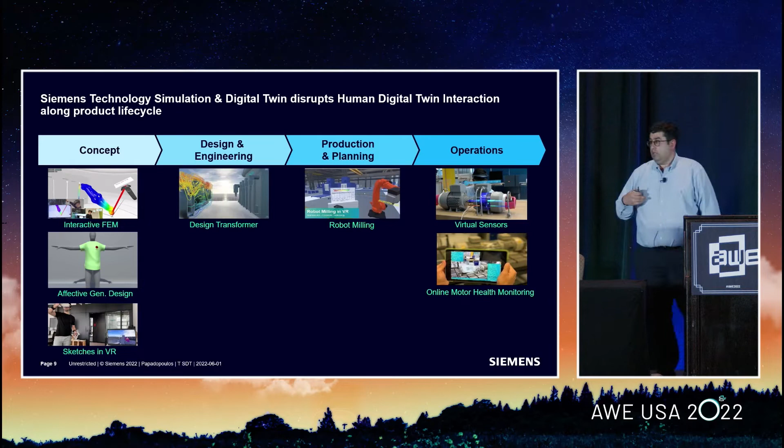Because we cannot have an infinite number of sensors, we're using virtual sensors there, which provide more information and augmented information to the operator, so he can take better decisions. Or we can offer him other information, like what's the rest useful lifetime of a critical component, or what's the status of the overall process.

As you saw before, all these applications have one common characteristic: in the back end were complex simulations, but the front end was really simplified for the user to interact and get results. We developed these applications, but each time it was done from scratch, more or less.

And we said, why don't we do that more systematically? Why don't we address the topic in a central way, so we can develop one platform that can tackle multiple problems. That's how we ended up with our proposal today here.

The reason is, in the engineering world, we currently have two major challenges. The first one is we have product development in silos. That's a common truth, and we are working

in a discipline-specific environment, so we may have tools that store the data centrally and orchestrate this data, but the simulation results can be retrieved and interpreted only by the experts. In this case, for example, a mechanical expert can interpret the mechanical results, but he cannot understand the computational fluid dynamics or the acoustics, or he cannot access them for multiple reasons.

And what happens today is the interpretation of these results from other experts relies on personal exchange and contact, so the experts have to meet and exchange information about the results. In this case, for example, if you have a field engineer doing a test and he needs information from the simulations, because the simulations offer 360 information for an experiment while the tests have only discrete positions of the sensors, he has to call the simulation expert and ask for this information. He himself from the field cannot retrieve the data because it's very difficult to interpret with the current situation.

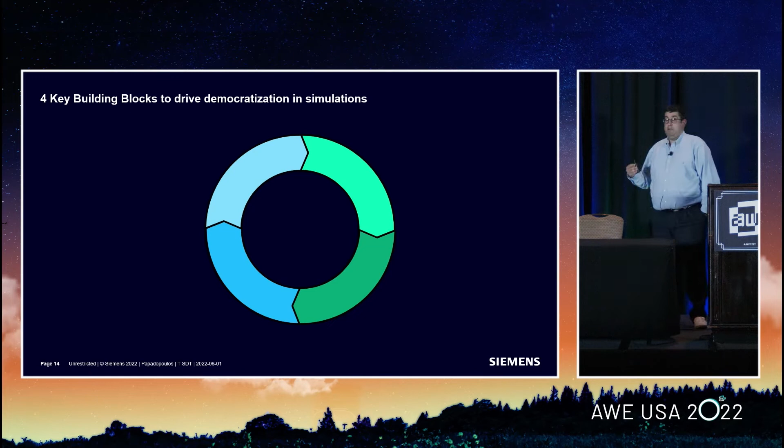Now, coming to the democratization, we at Siemens Technology believe that there are 4 key pillars that can drive democratization in simulation. The first one is real-time collaboration, how we can bring different people from different disciplines into the same environment, exchange information, and everyone has access to the same information in real-time.

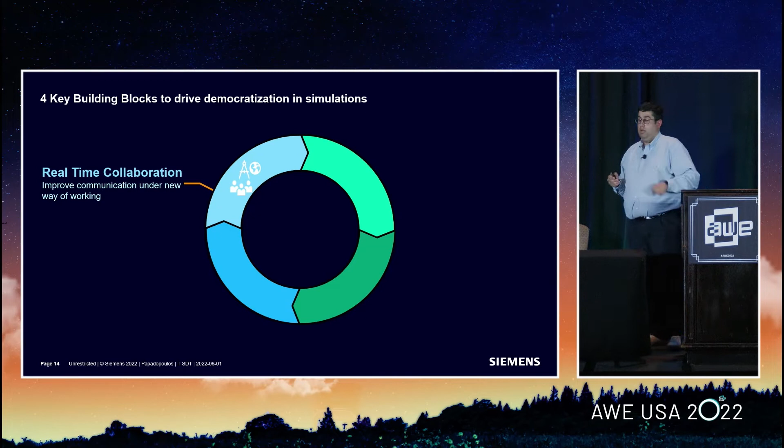The second one is interactive simulations. That's the next generation of simulations where novice users, especially in the concept phase, the very early phase, want fast feedback for their actions. If you are a novice user, you don't have the patience to wait for our traditional engineering tools, which take hours, sometimes days. You want fast feedback for your actions.

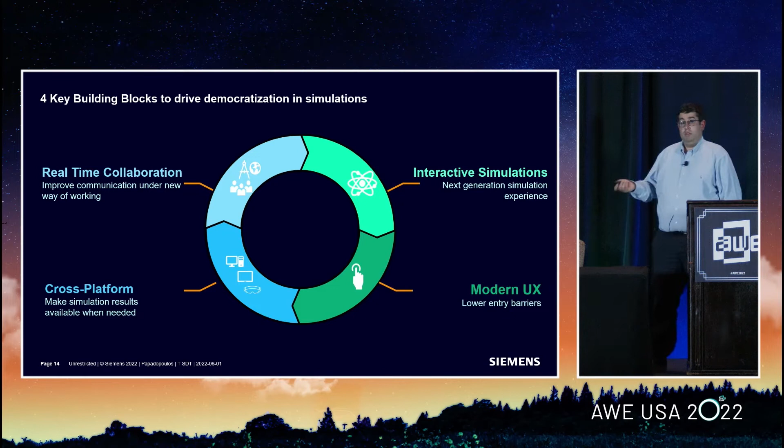Then modern user experience, which will help us lower the entry barriers for them and make the simulation world more easy and tangible. And finally, cross-platform. Nowadays, people want access to information when they need it and not only when they sit in front of a PC. For that reason, we have to make our simulation tools capable of running on different devices like tablets, phones, or even PC, VR, AR glasses, whatever is used by the user each time.

We sat together with my colleagues from Digital Industry Software, the experts we have there from the simulation and test solutions, and we asked: which use cases do we have in-house where we can demonstrate this democratization has a huge impact for the users? We identified 3 use cases.

The first one is acoustics, the interactive ones. As you can see in the small picture below, the acoustic experts each wear headphones, sit around a table, everyone listens to a sound, and they have this heat map generated from the simulation tools. If you ask me, I'm not an expert, I have no idea what these heat maps are about. Because sound is also about experiencing, not only something for a user.

What does this sound mean in my real context, in my real environment in the future? Or how can I perceive it spatially? So first-person immersive experience is very, very important here. But the results have to be physics-based and not just realistic, should be accurate, because we're speaking about industrial grade accuracy here, and the customers expect that from our tools.

The second one comes from one of our tools, Simcenter 3D. It's a simulation tool, a very powerful tool. It has a lot of fields of study. That's a huge advantage if you look at it from the point of content.

But if you are a novice user and you enter and you have all this physics and all these buttons, you are overwhelmed, you don't know where to start. So it's a little bit problematic, and the easy path to post-processing to analyze the results is not so happy, this whole process. But it's not only about the novice users, the experts there told us that they want more immersive experience and more collaborative environments. So that's why we said this use case is also interesting for our case.

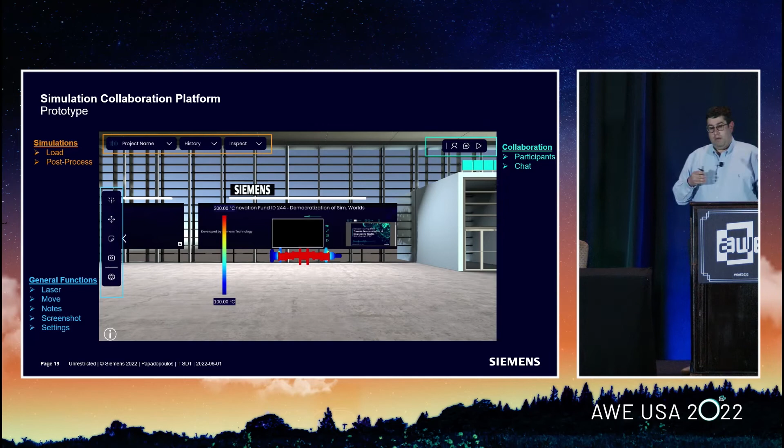The upper right one is with the collaboration part, where you can see the other participants there. You can start the chat function with the others, or you can go to the presentation mode. Then we have on the left side the bar, where we have the general functions, some generic functions like laser pointer, activate to move the object, or you can leave the sticky notes there.

You can take a screenshot, and there are settings where you can change between dark and light mode, or you can mute yourself, change the voice levels, and things like that.

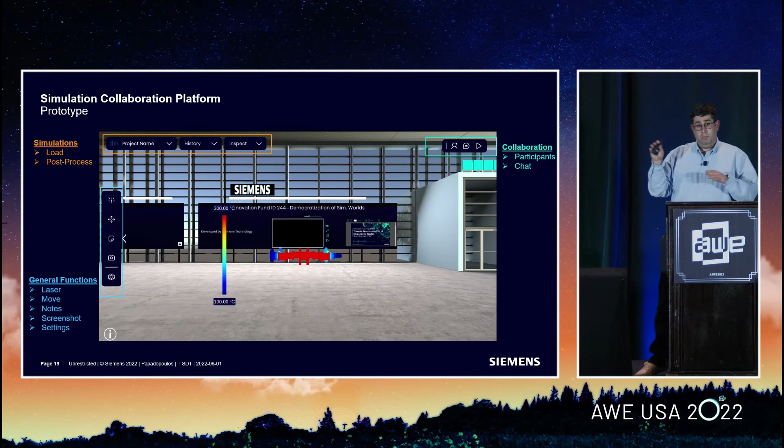On the upper left side, we have the simulation tab, where we have all the information for the simulation part, with some very basic functionalities. We asked: what are the functionalities that a novice user is going to use most? So we limited the options here to loading the geometry, loading results, and some basic functionality for post-processing.

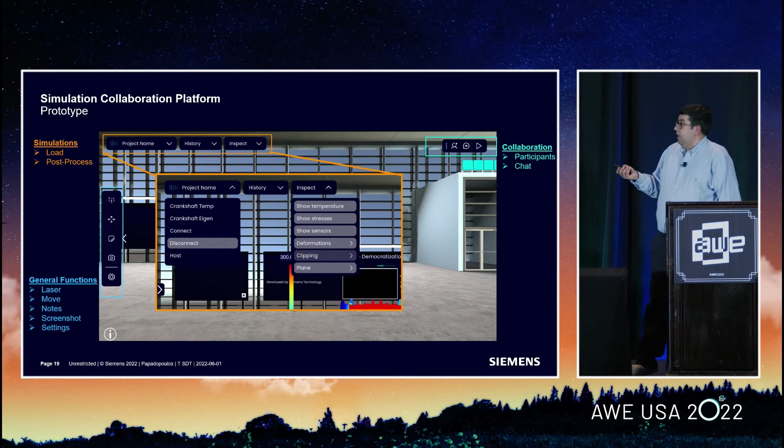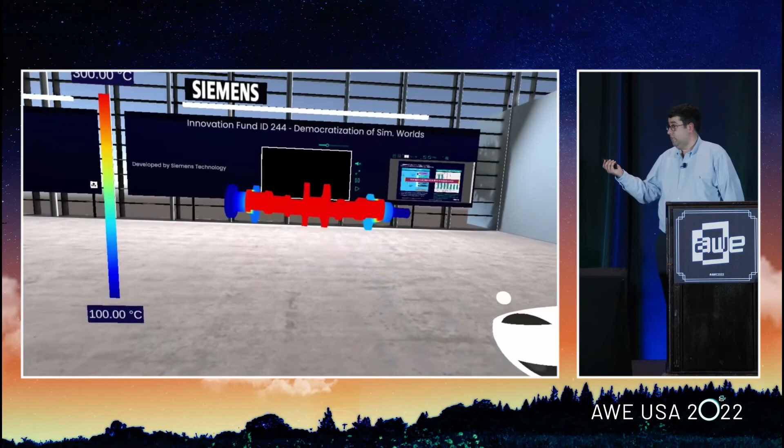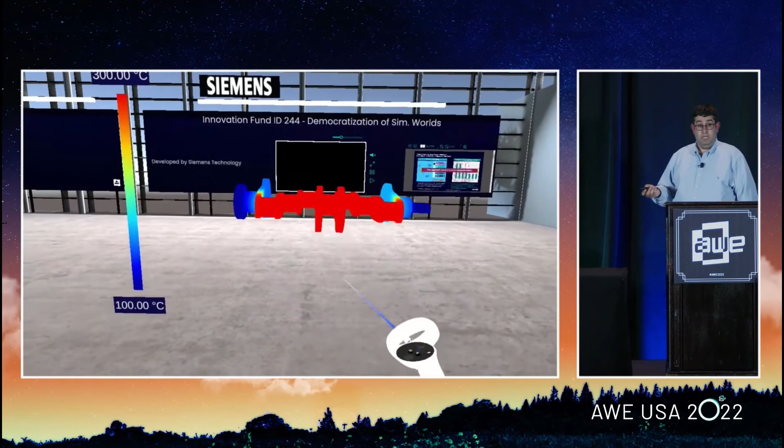We have prepared some videos to give you a look. That's the VR version. It runs with OpenXR, so we support various headsets, for example Oculus in this case, and also HTC Vive. Here it's very easy to manipulate the 3D geometry, rotate it, and scale it. If you are using a CAD tool on your PC, you know scaling with a mouse is not so easy - you need a 3D mouse, which not everyone has access to.

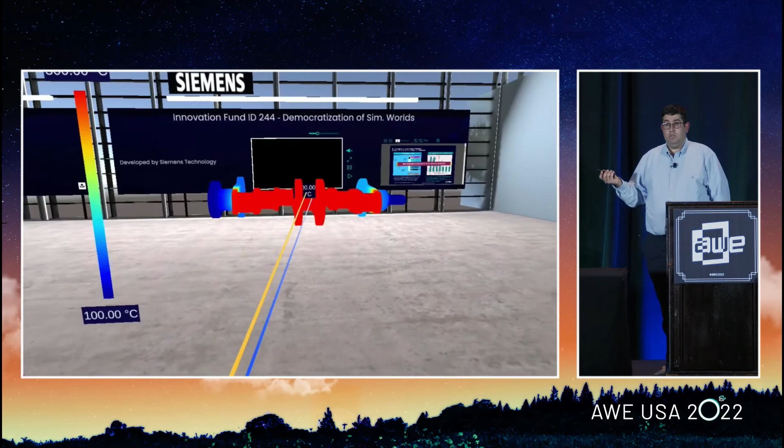You can easily, with a laser pointer, read the values at any location - no specific knowledge needed, just point somewhere and read the value. On the back side, we have integrated a presentation, so you can have all the information there: a video tutorial for how the environment works, and screenshots also.